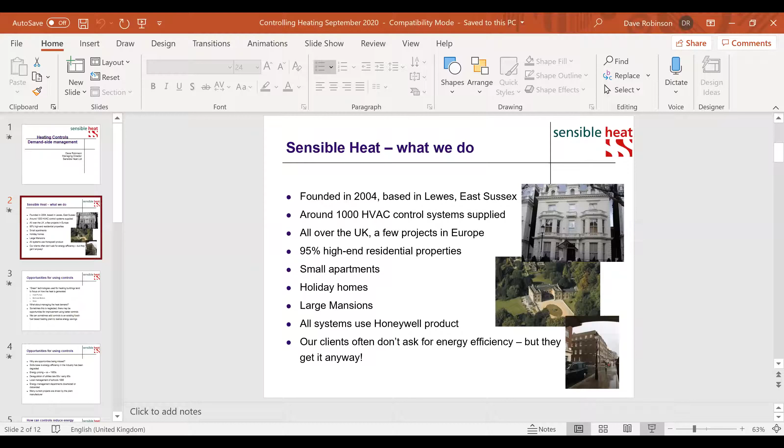Interested in energy efficiency, but if you like, a secret passion of ours is they get energy efficient systems from us whether they like it. I guess the other benefit is that we see.

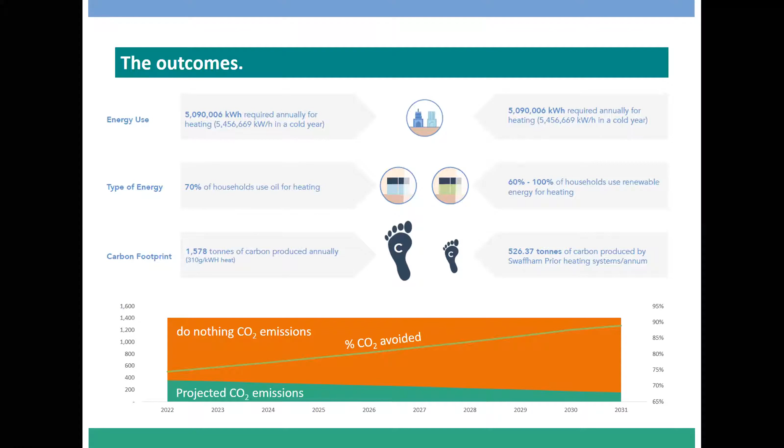So this really gives you a sense of where we're at in terms of reducing our carbon footprint and the amount of energy use that we're going to be potentially generating.

I just wanted to show you how we progressed through the funding. So the Community Land Trust were the ones who approached Rural Energy Fund and managed to get £20,000 to do their first initial feasibility study in the village. This was also a mechanism to engage with residents, to ask are you interested in us doing something or not. And there was strong support for doing something, taking off oil and being more environmentally conscious.

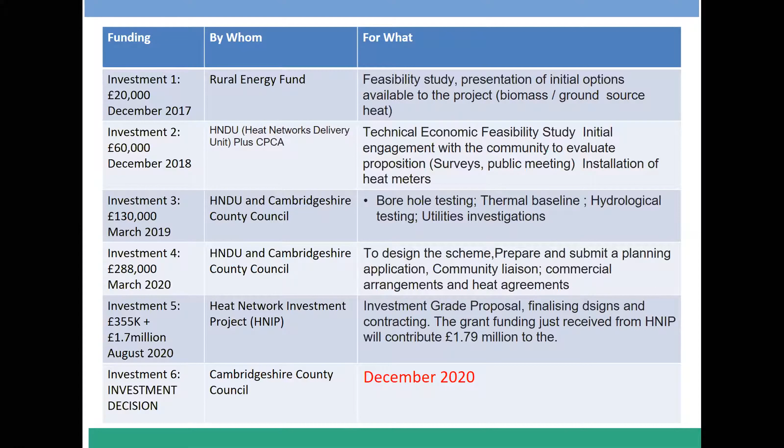So we're now currently in investment round 5, and we're in the commercialisation phase. We've submitted a planning application, and that's going to be determined next month, hopefully. And we're working towards an investment decision in December.

The farm currently has a tenant farmer, and the tenant farmer has worked with us and agreed that we can take this land. There's a barn on this land, and we're going to use the barn to host the energy centre, and we're going to use the field to drill 130 boreholes 200 metres deep to extract heat. We're also going to have an air source heat pump in there, and we're also going to have thermal stores, and I'll show you some pictures of that in a minute.

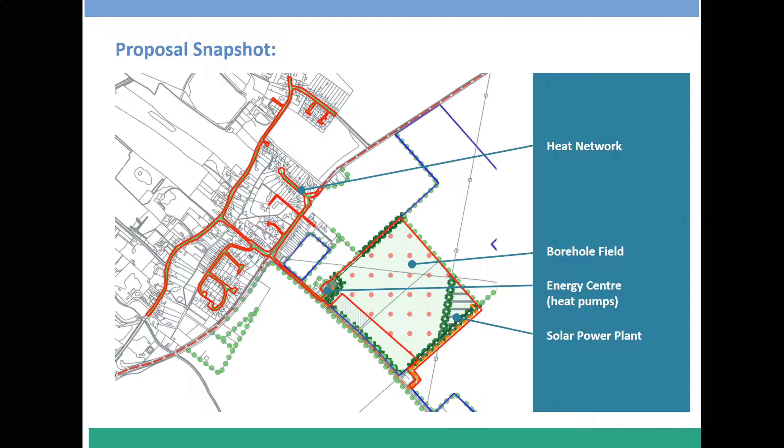The original plan was to also support the electricity, because you have to use significant levels of electricity for the heat pump, even though it's very efficient. We were going to be putting in some solar panels in the field as well to be able to generate renewable energy, and I'll talk to you about how we've changed that to an even better solution. So that's what we're trying to do.

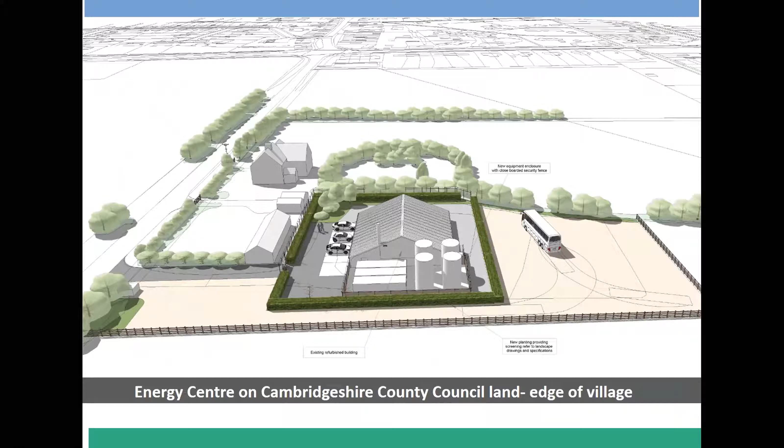This is just a quick infographic of what the original barn is going to be changed into as an energy centre. The idea is that we will also use this as an opportunity to bring school groups or visitor groups to see how you connect a range of technologies together and how they interact and function.

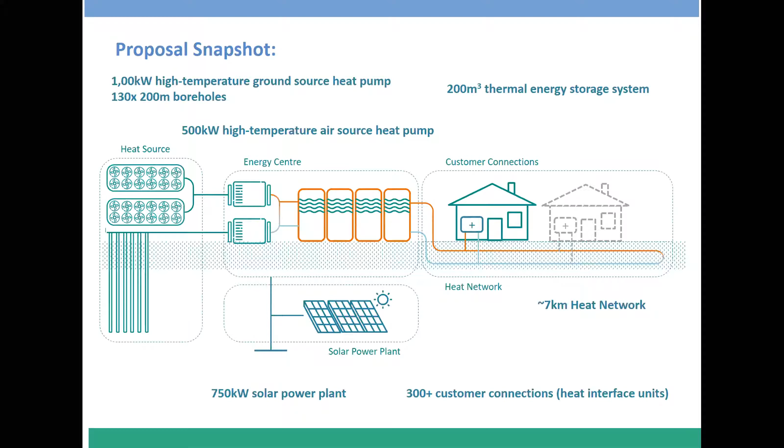Just to give you an example of the type of data challenge - when you have an oil-based community, you're not actually 100% clear on how much oil is used by a home, because what tends to happen is you get 1,200 litres delivered, but you might already have a residual level in your tank. So you're never quite clear how much you've got, and your bill just says 1,200 litres delivered on March 21st. So we had to try and work out how we were going to get much better, more granular data to support the calculations of just what size this energy centre is going to need to be.

So we installed heat meters in a number of houses, trying to look at different archetypes - your 4-bedroom listed building, your 2-bedroom more modern 1960s build, to be able to get an assessment of the profile of the demand as well as the actual demand. We've also had to access other sets of data to help us work through that. That was one big challenge that I think people don't realise you might face - getting good data.

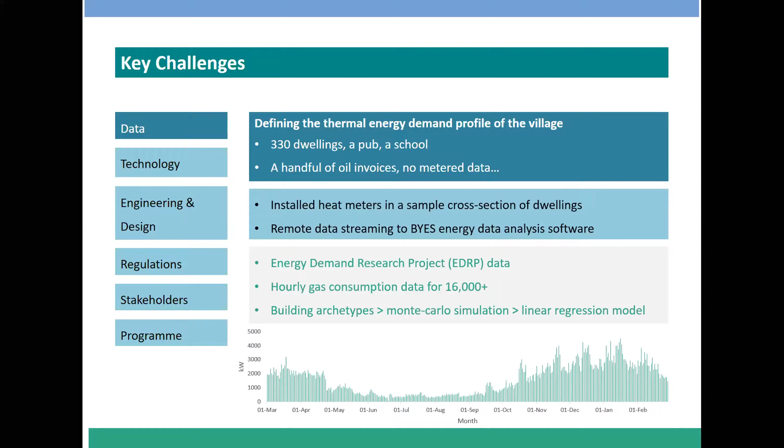The second challenge was around technology. In an oil-based village you tend to have oil boilers, oil tanks, and a high temperature heating system. Traditionally, like my own air source heat pump, you work at a much lower temperature compared to the wet heating system already in the house. So we needed to design a system that fitted with the existing wet systems in people's homes, because otherwise the cost of replacing all the pipework and radiators would be too much for the project to bear, and it would be a barrier for residents.

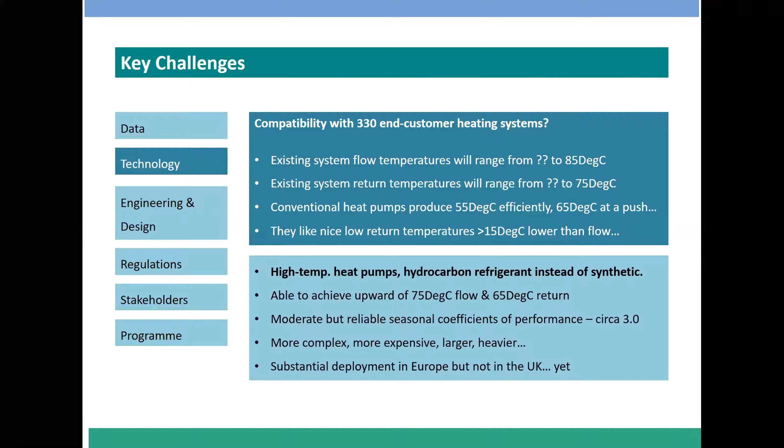So we've had to really think about what we can deliver and do a lot of market research. What we've come up with is a high temperature heat pump that can work at 75 degrees. This is really important for residents because it minimises the impact as you go into the home. But it's more complex, more expensive, larger and heavier, and deployment hasn't really taken off yet in the UK, though it's well known in Europe. So then the next challenge I wanted to highlight was around engineering and design.

We'd originally started thinking we were going to do an open loop ground source heat pump, and we changed to a closed loop. Partly that was because when we drilled our first test borehole, going down 200 meters, we hit significant clay layers called green sands clay, which meant our loop would get bunged up with claggy clay, causing a lot of downtime with maintenance. That was a really positive thing to find out early on, before we'd started anything, that we had to change to a closed loop system.

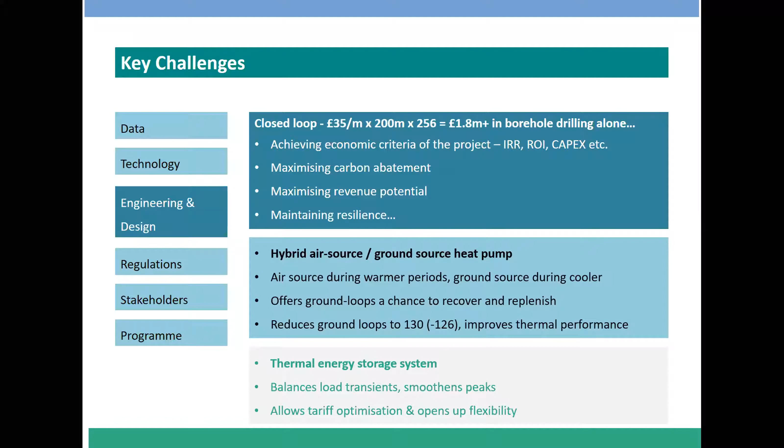We also went for a hybrid solution of ground source and air source, because that came out as a more cost-effective mechanism. We're going to feature the air source more heavily during the summer months, which allows the ground where the ground source heat pump is installed to warm up, so that when we extract heat over winter using the ground source heat pump, we don't end up freezing the ground over time. That was probably one of our biggest learning lessons, that you have to be really careful how you deploy arrays of vertical ground source heat pumps for community scale projects, so you don't freeze the ground.

So then the other thing around regulations, for example, is we've put in our planning application, which is just being determined. We had to go through an EIA screening process, an environmental impact assessment screening process. Fortunately for this project we weren't subject to an EIA, because that would have added time, cost, and additional work. But it's now being determined, and we're also having to look at listed building consents.

With a lot of villages there's pride in what the village looks like, so there was quite a lot of concern about how you would connect a heat network into some of the lovely old buildings. We're working together with Historic England, East Cambridgeshire District Council Conservation Officer, and the archaeology team at Cambridgeshire County Council on a local listed building consent order, which applies to the whole village across all the archetypes of listed buildings. This lets us agree in advance how the access looks into the homes, so you don't have to submit an application for every single listed home that connects to the local authority, which would take up a lot of time for everybody and is another barrier for people's engagement.

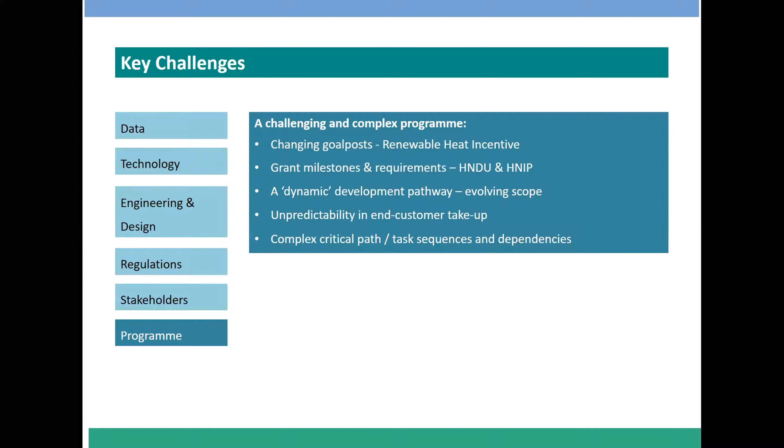Now, you've noticed I've just clicked over stakeholders, because I'm going to come back to that in a minute. One of the other really big problems for projects is how do you make all the revenues stack up for a project. For this project, we are relying on three key areas of mechanism of income.

One, that residents sign up. And just so you're aware, we've guaranteed them that this will be less than the price they currently pay for oil. The second thing is we've also guaranteed to them that they won't have to pay to access the project if they sign up before we construct. So what we're trying to do is take a barrier out, which is the ability to pay.

If you have the ability to pay, you might already have taken the opportunity to go and do an air source heat pump on your home. But actually it's a big barrier for many people. It does mean that we need at least 160 residents or homes to sign up to our project. And a second part of our income is we're looking to access the renewable heat incentive.

Some of you might know that this is closing at the end of March next year, and there are quite a lot of criteria that you have to fulfill to be able to access it. It's a key part of our funding, and we're working very hard to get there in time. There's a big risk that we don't get there, and that's one of the big problems that we're managing at the moment. The other source of income we're going to be looking at is around how can we sell the carbon emissions from this project so that we can make the project stack up financially.

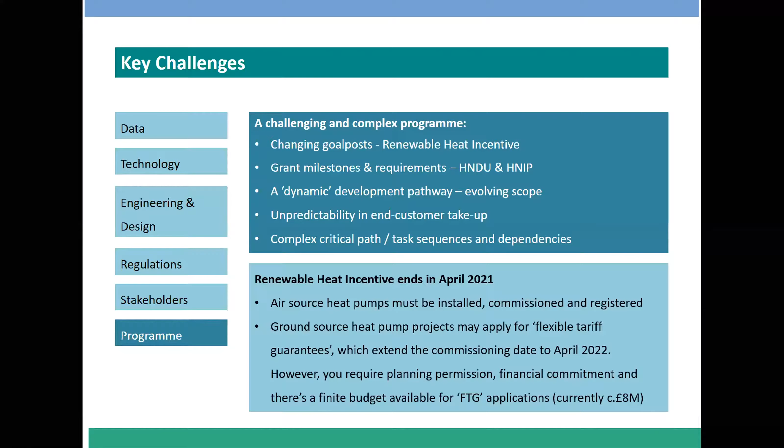So where we're at now is we've got technical feasibility established, we've done our designs, we've done techno-economic modelling, we've looked at different options and come up with the option that we think is the most applicable for this village. We've done our planning application, we've done all of our archaeological investigations. We're now in discussion with UK Power Networks around the load this would connect to the distribution network, and we've been doing a lot of soft market testing with all our supply chains. So we're currently working on our investment grade proposal so that we can make a final investment decision by December.

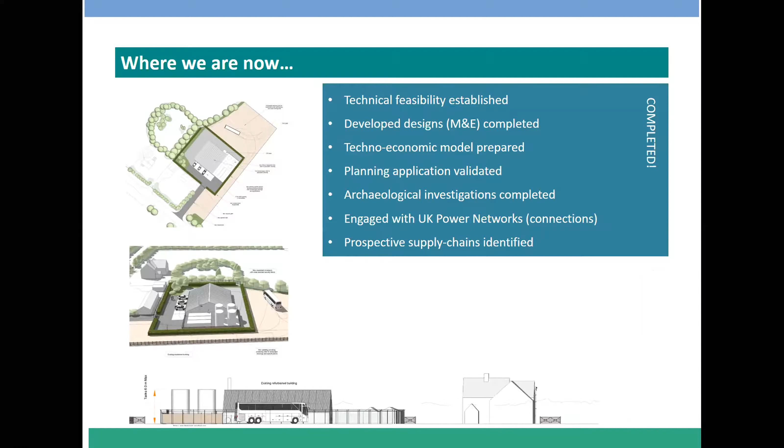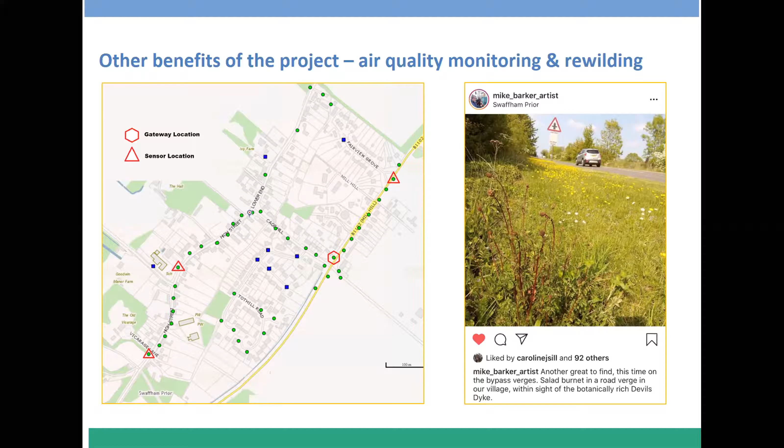So one of the other benefits of the project is that we have put up a number of air pollution monitors throughout the village, so we can try and see just the air pollution benefit that might come from stopping fossil fuel burning. And the other benefit we're working on is how do we add some significant more rewilding into the farm that we're taking over, because you can have a ground source heat pump in there, but you can't plough over the top of it because you can't plough deeply. So what is it we can do across the village to support that?

I just wanted to finish by saying there's a lot of people in the village who are vocal and want to be part of it. There's also a lot of people in the village who are more sceptical. And then there are some people in the village who are absolutely anti the project. So it's a very difficult balancing act to get a whole community to come forward and support something. I'm really happy to have a detailed discussion about that later. That's it, I think.

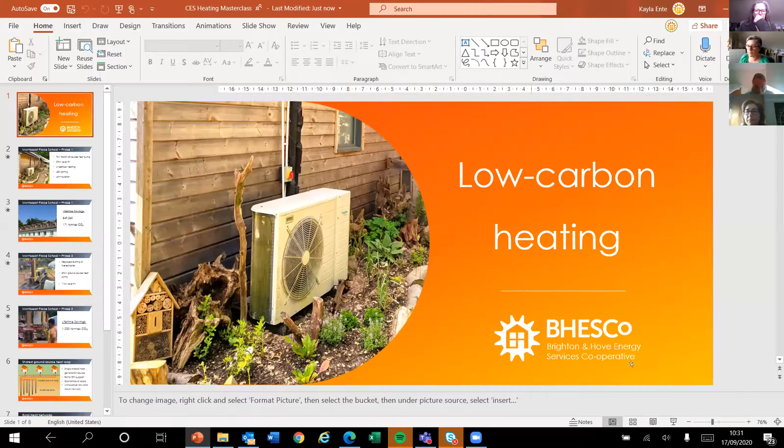Right, my name is Kayla Ente. I'm the CEO of Brighton and Hove Energy Services Cooperative. We're a membership cooperative developing community-owned energy projects, and our focus is on renewable heating.

It's very challenging to go after Sheryl's presentation because their project is so impressive and ambitious. However, this is just one customer where we've worked over a period of 4 years to completely decarbonize their site. So I'm going to take you through the journey.

They're a school in Framfield, a Montessori school, and the governors of this school are very future thinking, and the students are really involved with climate. They've done a terrific job of demonstrating how you can become zero carbon emissions on a school. They were on oil heating, and they bought this property about 4 years ago, and we've accompanied them on the entire journey.

So the first phase was about installing an air source heat pump for the small nursery, which you can see here. We put 27 kilowatts of solar PV on, about 10 kilowatts on the nursery building with underfloor heating, so that the small children could play on a heated floor, with LED lighting and loft insulation in the main building.

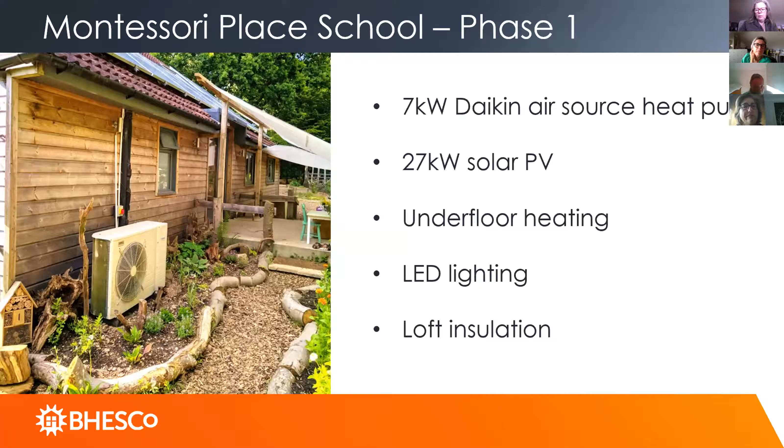This nursery building they built back from scratch, so we were able to put in insulation. This building is the main building, and that's where we did the loft insulation in those eaves, and we put the solar on.

So the interesting thing about doing renewable energy and energy efficiency, and the whole reason why we're involved in it in the first place, is because we really do believe that you can save from generating your own electricity and saving on your energy.

And for this customer, the lifetime savings that they'll get, even paying us back for our upfront finance, was about £50,000, and they're going to be saving 171 tons of CO2 emissions over the life of this work, which is about 20 years. Of course, we all know that the grid is decarbonizing over time, so this figure could be overstated depending on how low we can get the grid to be.

The second phase was to replace the existing oil boiler. So we installed an 87 kilowatt ground source heat pump. We had problems in the drilling as well - we had to put in steel casings in the boreholes in order to keep the ground from leaching into the boreholes, which added extra expense to the project.

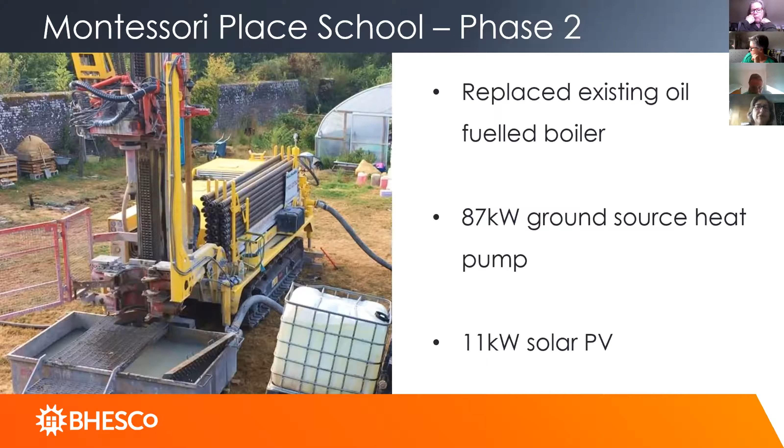And so then we're also putting in 11 kilowatts of solar PV to help with the heat pump, additional to the 27 kilowatts they already have on the site. You can see that they're growing their own food, and the kids learn about agriculture as well, and it's a really beautiful school to be involved with.

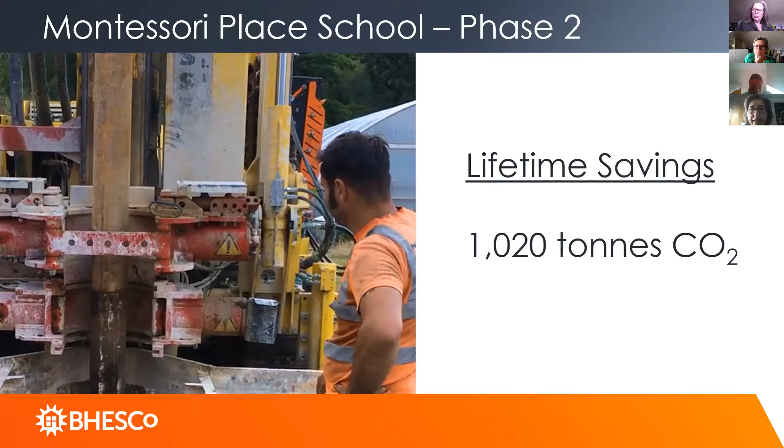We estimate that the lifetime savings, again, from the ground source heat pump will be over 1,000 tons of CO2. Again, that depends on how much we decarbonize the grid. But the most important thing for us is that we're going to be taking out that oil tank completely, so they're not going to be using any fossil fuels on this site anymore.

I just wanted to talk a little bit about villages as well, because BHESCo's strategy is to start pursuing microgrids, looking at small clusters of properties and putting in shared ground loops.

As we know, the RHI is going to change, so I'm not sure how sustainable this is going to be in the future. But like Sheryl said, if we can get a price for our carbon emissions savings, if there's some way that maybe community energy groups can work together to put together our carbon emission savings and work at scale, that might be an idea for us to be able to generate some value from our projects together to be able to sell that carbon emission savings.

But we definitely feel that the decarbonization of heat is one of the most important issues that faces us as a nation, not only to deliver low carbon heat, but also to deliver affordable heat.

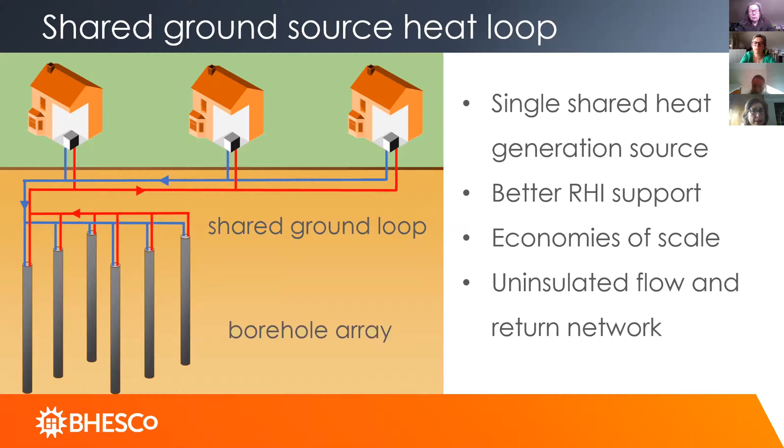And so I just wanted to talk about that for a minute and to show you the shared ground loops that we're looking at in a village with the clusters of properties. This is 22 homes that we would do on a shared ground loop. We're working on this project right now, and we're hoping to be able to deliver it before the end of the RHI, as Sheryl has said, in the end of March.

But we believe that community ownership of heat networks in an ESCO model can be really attractive, and we're going to see if we can get this to work in this village. It's part of a larger plan to install 4 megawatts of solar generation, and look at supporting the grid, because grid reinforcement is a really big issue, cost-related issue with heat pumps. Cheryl didn't talk about that, but that's definitely something that needs to be addressed, and I hope we can talk about that afterwards, what we can do in community energy to support the grid, because these low voltage networks

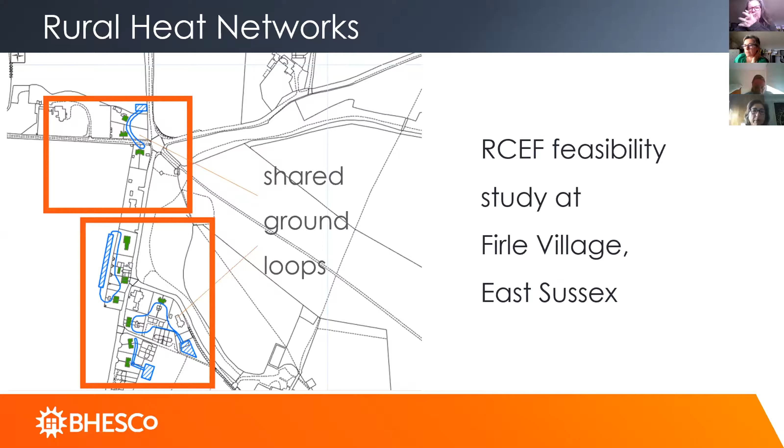So maybe later we can talk about this project, and if you have any questions, I'm certainly happy to answer them.

Hi, Kayla. Well, that's great. Thank you very much. And just to reiterate that small is beautiful, and quicker and easier to put into effect than the fantastic project at Swaffham Prior, which Cheryl was saying has taken so much time to get to this point. So we've got a few questions for you as well.

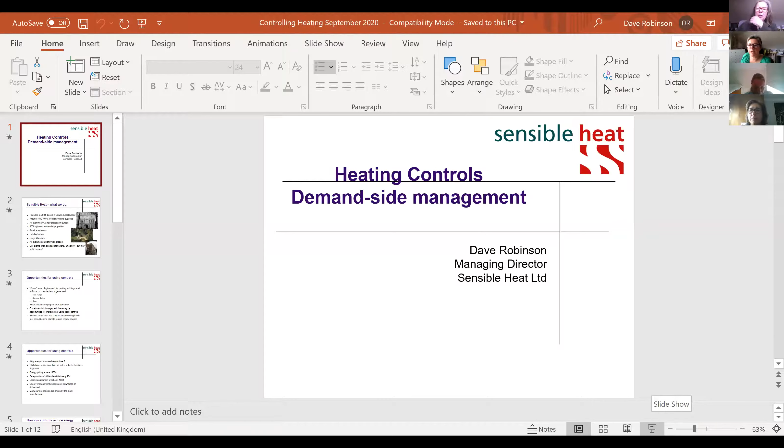See if we're seeing that or not. Dave, we can see it, but I think your sound has gone again. Right, okay, that might be problematic. Can you hear me now? Yeah, I think it's still slightly on. Do you think we should show it screen share from your machine, Liz? Yeah, I'll end this then. Right, sorry about that. So can you hear me all right now when I'm not screen sharing? Yeah, so maybe I'll turn the video off. How's that? Okay, can you hear me now? Yeah, and Liz will now share her screen so we can see the presentation.

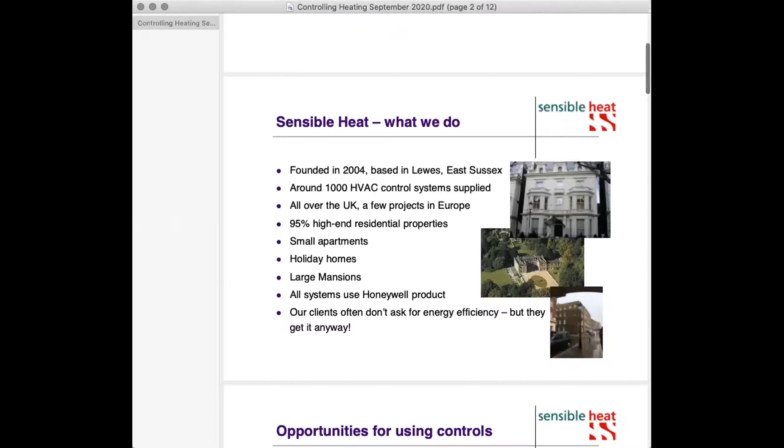Okay, I hope everybody can see that. It's going to be not so good because it's a PDF version, but never mind. Hopefully you can all hear me. Can you give me a thumbs up, Nikki, if you can hear me? Great, lovely. Okay, so here we go again then.

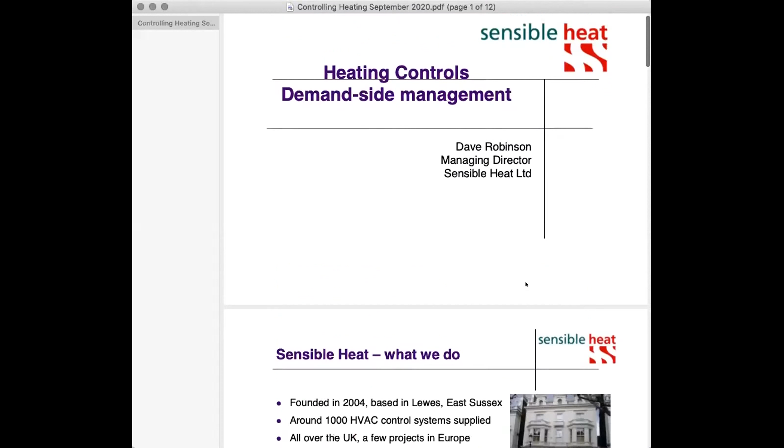So my name's Dave Robinson. I'm MD of Sensible Heat Limited. We're based here in Lewes, if we can have the first slide, Liz, up.

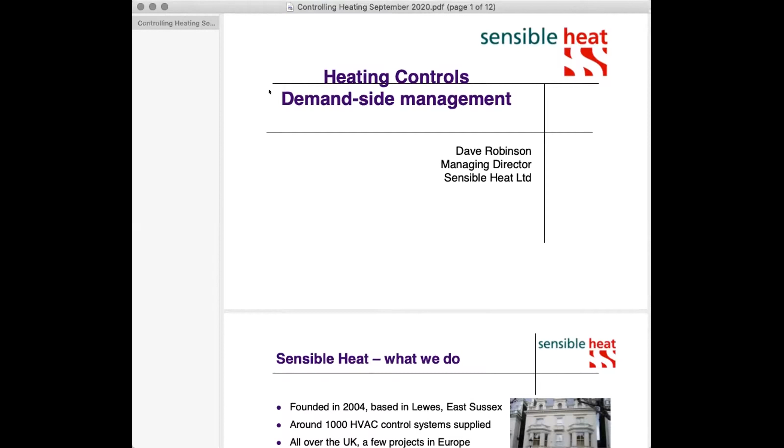And we've been going about 15 years. We're a bit of an odd company, perhaps odd at first sight for this kind of forum, because we are very specialist. We do clever heating and cooling controls for expensive houses, and we do it all over the UK, a little bit in Europe. I guess we've done about 1,000 projects in the last 15 years, which is quite a lot for a small firm, very specialist, as I say. So these are a lot of celebrities' homes. That's David Beckham's house there, in London, and various oligarchs and so on we've worked for in the past. So that seems odd because none of these people are at all interested in energy efficiency, or most of them aren't anyway.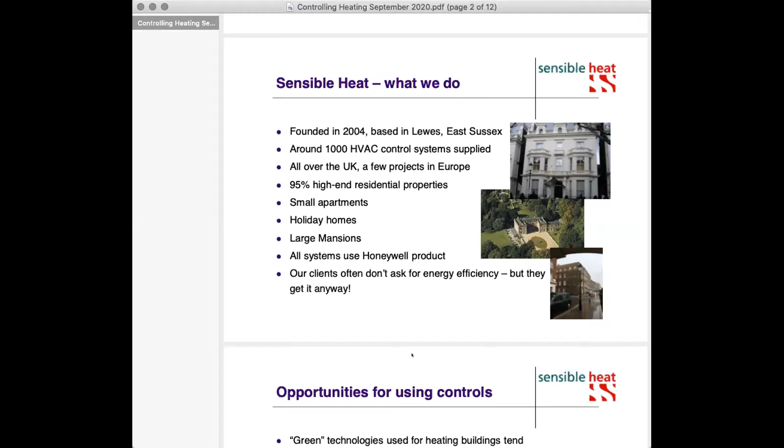However, the buildings are all quite complicated. They're using very much the latest technologies. We've done lots of work with heat pumps, combined heat and power engines, all sorts of things go into these houses, because they have to work to a high performance level, and often there are planning reasons why they have to be green, whether the owner wants them to be or not. So we've seen a pretty large selection.

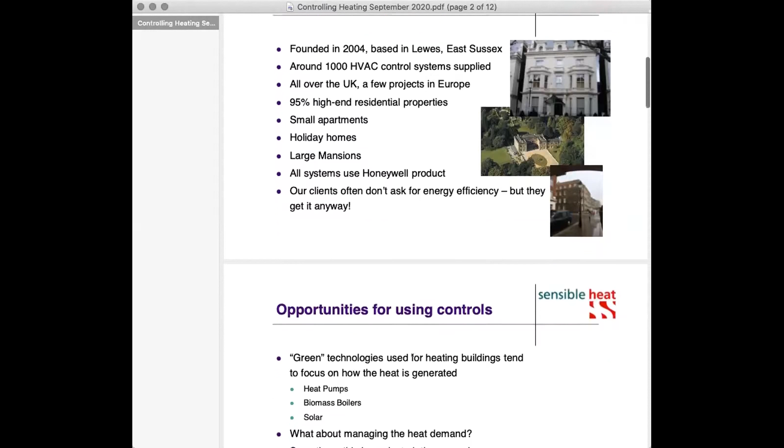So I'm here really not to talk about posh houses, but to talk about the controls themselves, because prior to that business, I was in the building management system business. I worked 10 years for Trend, that you may have heard of, and 10 years for a manufacturer that we started up, spinning out of Trend. So I had 20 years in commercial BMS, building management systems, which are really for commercial buildings, schools, hospitals, supermarkets, all sorts of things. What I've found over the years is that now that we're into this sort of green phase, if you like, everybody tends to focus on the prime mover in the heating scheme, i.e.

What's generating the heat—we hear a lot about heat pumps of various sorts, different boilers, solar and whatever, but we don't hear a great deal about what's happening in the building itself, the consumers, if you like, of the energy.

And whether we could do something about managing the demand for heat rather than just generating it in an energy efficient way. Couldn't we do something to manage the heat better? Well, the answer is yes, and that's what controls are for. We tend to focus on new builds or major refurbishments where we can change the heating system for something greener, but we've still got a huge chunk of buildings in this country—something like 23 million residential properties, and goodness knows how many commercial buildings—that already have systems in them that are not time expired. We can't change them all overnight. So is there a quick win to fix a lot of these buildings and make them more efficient without changing all the plant? I think there are opportunities there.

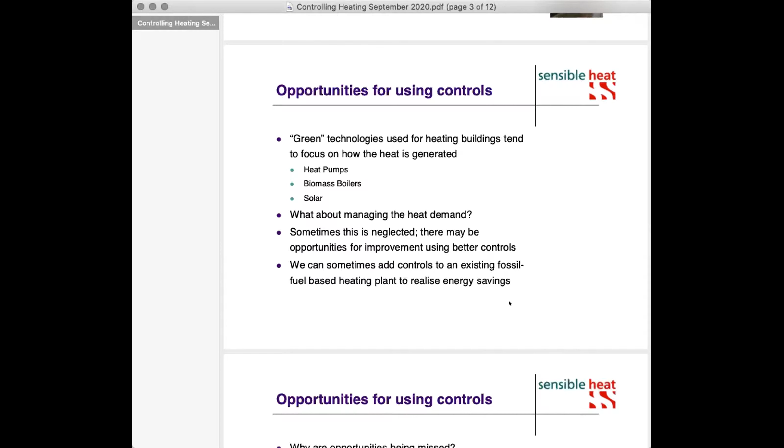Just a little bit of history here, because I've been doing this for quite a while. Back in the 80s, we were just coming out of an energy crisis. Energy was very expensive, and lots of organizations invested heavily in teams of people to understand that and manage energy better.

Local authorities all had quite big energy management departments. Lots of private organisations too—for instance, we worked a lot with Sainsbury's back in the 80s. They had a whole department just looking at energy in their stores, and we in the controls company had a whole team working with them to try and reduce energy usage in supermarkets, because they had a big store building program in those days.

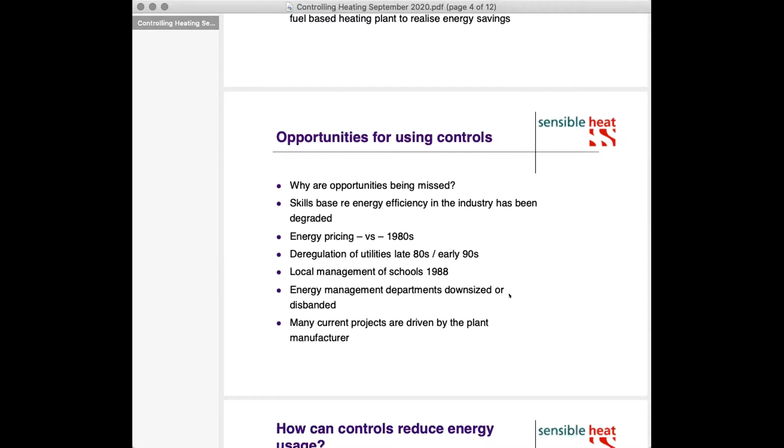Lots of things happened after that. Energy got cheaper, utilities got deregulated, which meant that energy managers, the ones left, were really spending a lot of their time doing the best tariff deals rather than putting technology into buildings to save energy. I'm sorry if there are energy managers here who think I'm maligning them—not at all, they were doing their job, but it changed things. So that's kind of what happened.

We lost a lot of skills in the industry, a lot of people, a lot of critical mass of people who knew about using controls to save energy. That's been displaced largely by manufacturers selling equipment, like heat pump manufacturers. They're selling their heat pump, which has its own controls on board, but that may or may not be the ultimate solution for the overall project—they're only looking at their little bit of it. So it's very much plant-centered these days, and I'd like to challenge that and say I think we can do better than that.

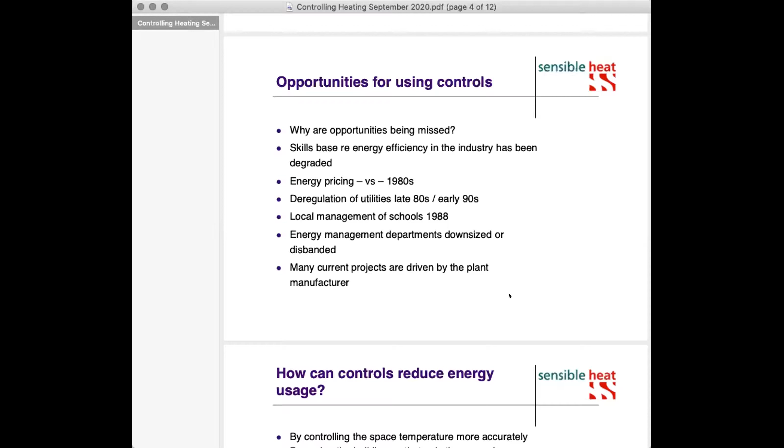So how can we use controls to save some energy? The first thing is to control the space more.

I don't know what happened there—I think somebody is not on mute. Could everyone just check that they've muted? Apart from Dave, obviously. Thank you. Okay, thanks, yeah.

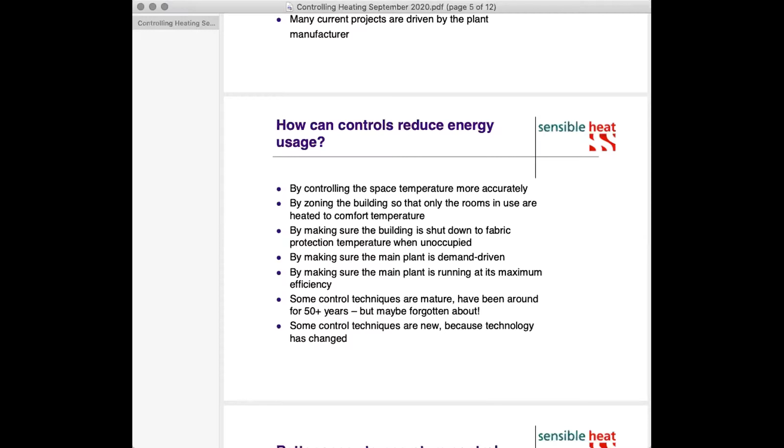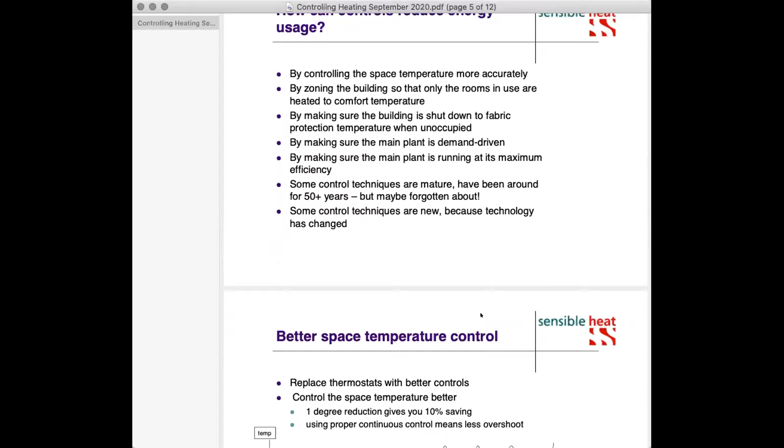We need to control the space temperature more accurately—I'll talk a bit more about that in a minute. We can zone the building up, because often the whole building isn't used all of the time. That's not true of maybe a school, but it's certainly true of a house, and true of buildings between those two extremes. When the building's not in use, we need to make sure it's controlling, not turned off, because you'll get fabric damage if the building gets too cold and damp. But we can shut down the temperature in the building and save energy that way. We also need to make sure the plant only runs when it needs to—when the space needs heat—and that the plant is running at its maximum possible efficiency. I'll touch on that again later.

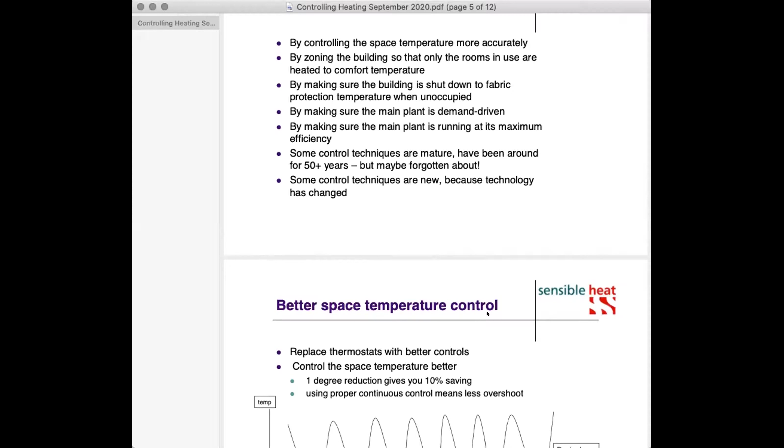So some of this stuff is well trodden, but may be forgotten about. Some of the techniques, some of the new technology we've had in the last 20 years, means we can do new stuff that we couldn't do back in the 80s, and I'll touch on that as well.

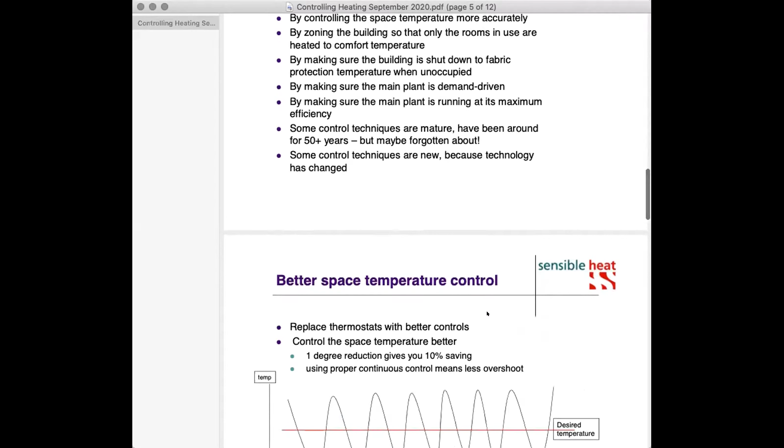So this business about temperature control. If we have a crude thermostat, which is an on-off device—I'm too cold, turn on; I'm too hot, turn off—you will get this kind of temperature cycling around the desired temperature. The problem is that you'll see the troughs more than the peaks as an occupant, and you'll tend to set the whole system to a higher temperature so you don't get cold. That means all the peaks are areas where we're wasting energy because we're hotter than we need to be. There's an old rule of thumb, God knows where it came from, but it's been around for donkey's years.

Very, very roughly, a degree over temperature wastes maybe 10% of your energy bill. If you can reduce your set points by a degree, you're going to save roughly 10%. Now, of course, that doesn't stack up all the way down to zero—it's not a linear thing—but it's not a bad rule of thumb for roughly how much energy you can save. It's not very much in terms of temperature reduction, but it saves a whole lot of energy.

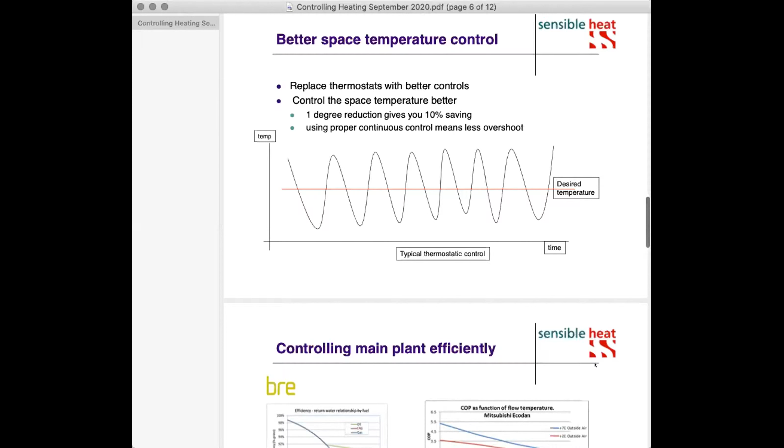So better temperature control: we need better devices rather than crude thermostats controlling things, and we need to be much finer in our granularity of control. So we need more thermostats, basically.

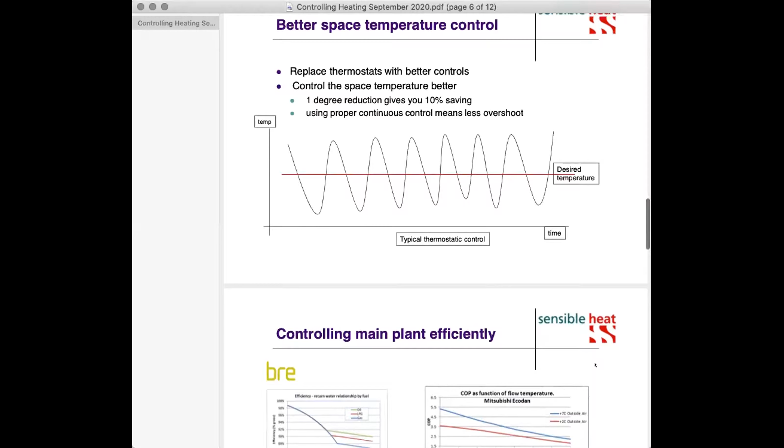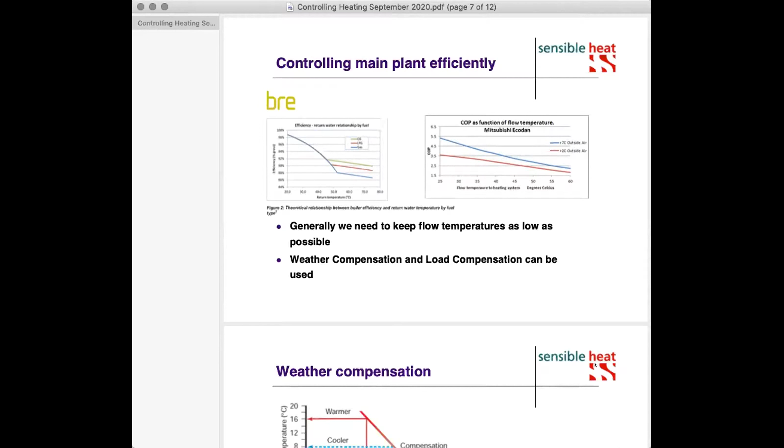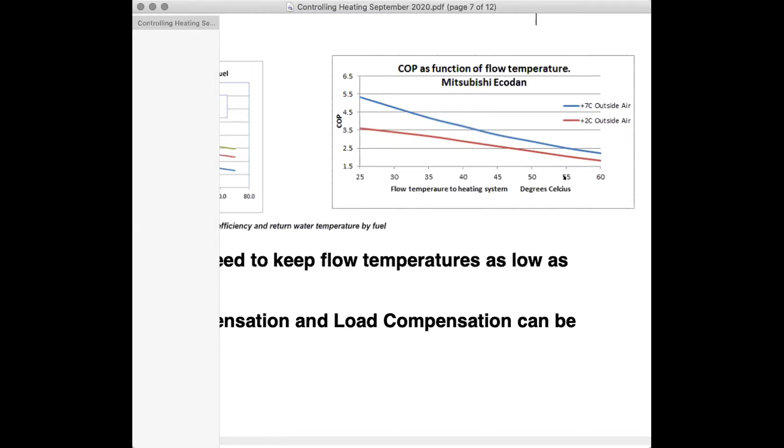Just moving on to the issue of making plant run efficiently. Now, we've heard a little bit about heat pumps—coefficient of performance, COP. That's the right-hand curve there, and that's a curve for, in this case, a Mitsubishi Ecodan heat pump, which is a pretty common air-source heat pump that often does hot water as well, which, as we've heard, is the Achilles heel of the heat pump, because the coefficient of performance drops off quite a lot as you increase the flow temperature coming out of the heat pump. That varies again on an air source heat pump, and it varies with outside air temperature as well.

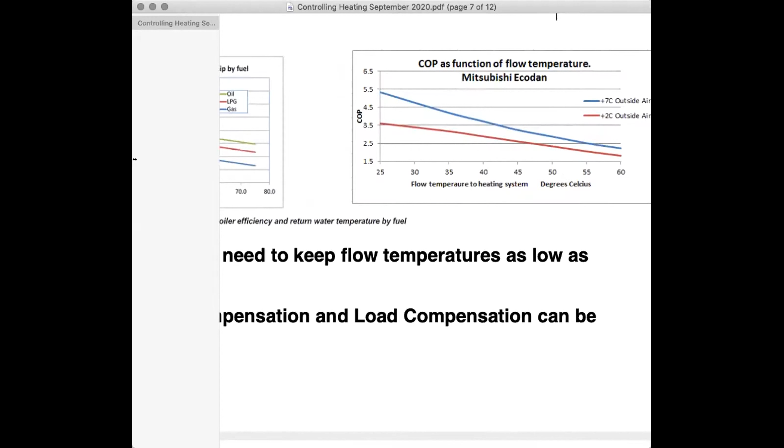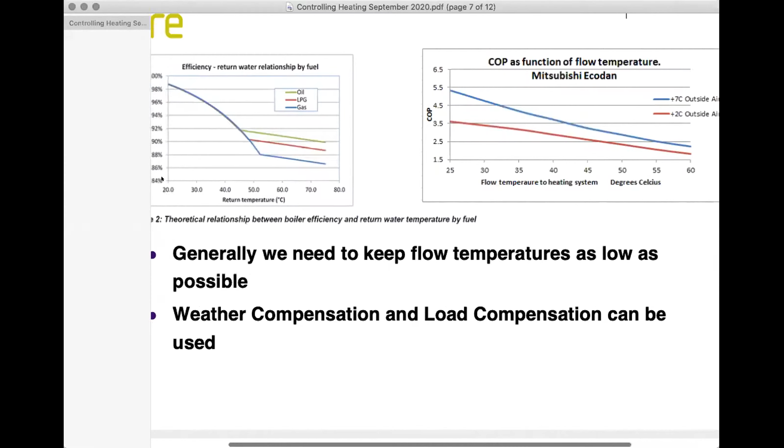So the coefficient of performance, just to remember what that means, is a sort of efficiency—it's 1 over efficiency, in fact. When you get down to a COP of 1, you might as well be on an immersion heater or electric resistance heating, because it means every kilowatt of electrical energy going in, you get 1 kilowatt out. It's only when you're up at the 2s and 3s that they start getting useful, because you're getting a multiplier on the electrical power.

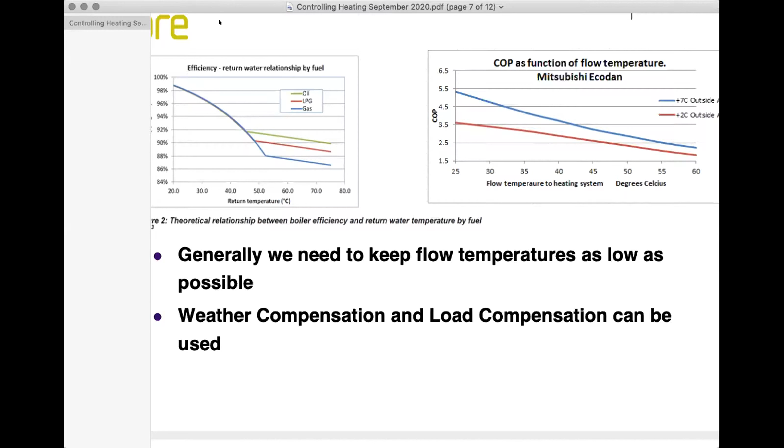That's true, but if you look at the boiler issue on the left there, boilers also need to be running cool, especially if they're going to condense. That's what the knee in the curve is all about—you see where the slope changes radically depending on the fuel. The bottom one is gas, so that has a condensing temperature; the flue gases have a temperature of 54 degrees, I think it is, for natural gas. What it's saying is, if we can get boilers to condense, then the flue gases condense, and we're recovering the latent heat that's in the flue gases—all the stuff that would normally go up the chimney. We're recovering the latent heat of condensation, and that helps the efficiency enormously.

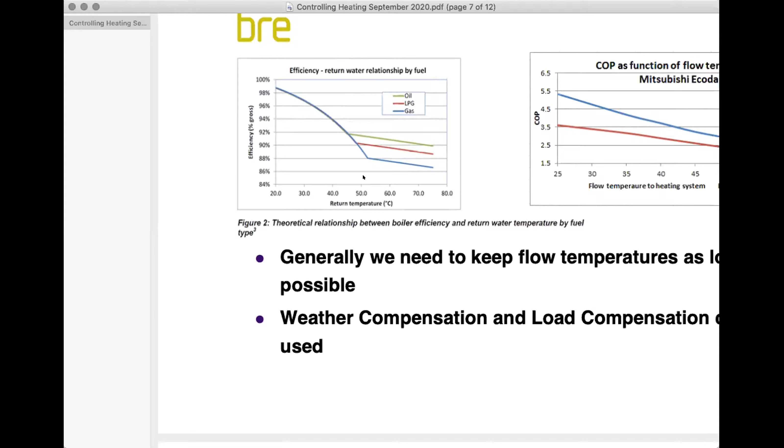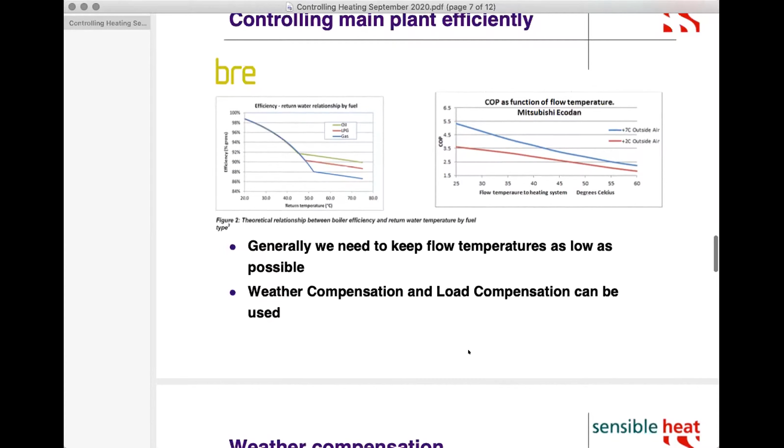So somehow we've got to get the water temperatures down, and that's tricky, especially with regard to domestic hot water. As we heard earlier, it's a problem because your domestic hot water at the taps needs to be at 55, 60 degrees or so, at which point you're getting poor efficiencies out of any of these systems. So we need to mitigate that.

One way we can do that is with weather compensation on the heating. This is a well-worn technique, and basically you can reduce the flow temperature going out from your boiler plant in mild weather—that's what it's all about. Because if you think about it, your boiler is sized for when it's really cold outside, running at full chat to heat the building. When it's mild outside, say 10 degrees, you only want maybe half the flow temperature, because you only want half the amount of heat, let's say. So you have a slope, and you can reduce the flow temperature going out, and hence the return temperature coming back to the boiler.

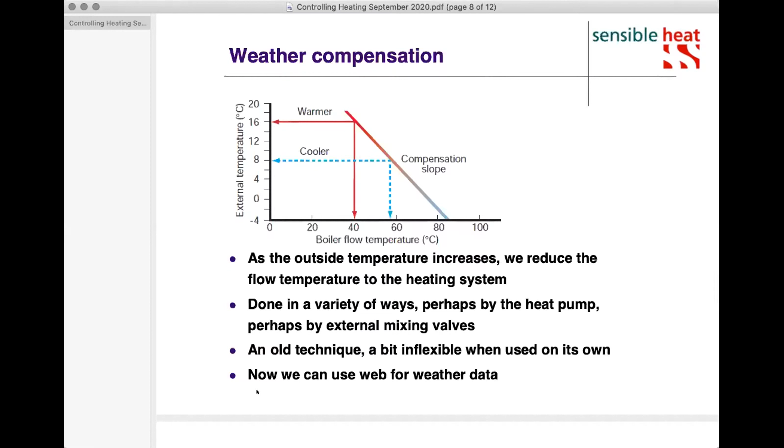That's usually traditionally done with an outside sensor. We can now use web data for perhaps more accurate temperature measurement, because that gives you a trend. Some systems now use prediction to tell what's going to happen next with regard to outside temperature. But certainly we need some sort of control.

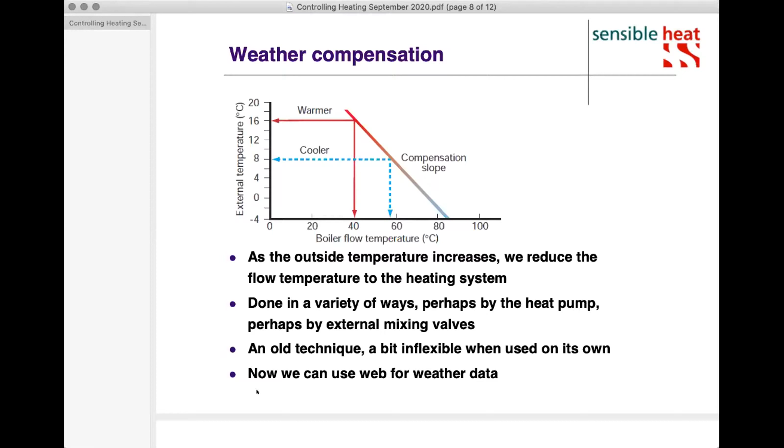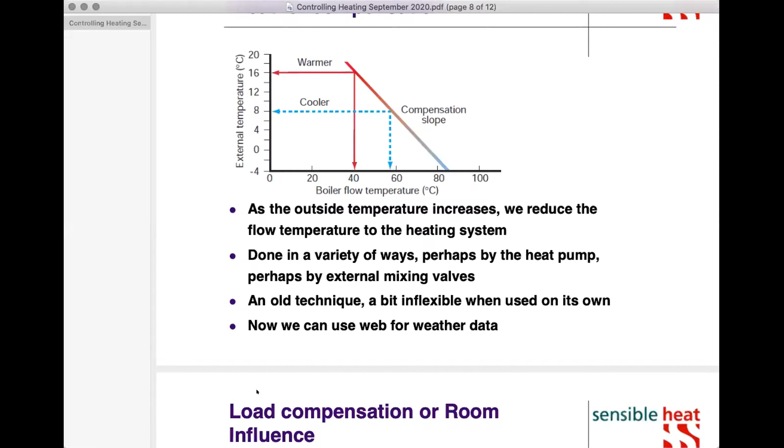Some heat pumps do this, and some boilers do this, but they tend to be boiler centric, and sometimes that's compromised by the system designed downstream of the boiler, because you've got underfloor heating, radiators, other things to heat as well, and that tends to be problematic. So you may need to strap external controls onto the system to get the maximum efficiency out of things.

The other technique - ignore the horrible graph. The takeaway is that weather compensation is a bit of a blunt instrument, because it ignores what's going on inside the house or building. It's only looking at the outside weather. You might have a sunny day and suddenly you don't need so much heating because the sun's warmed up the rooms, even though the outside temperature is low.

So you have a thing called room influence or load compensation, and that uses sensors in the house or building to affect the weather compensation curve. So if it's warm in the house, you'd maybe reduce the flow temperature. If it's still cold in the house, you'd boost it up.

External controls can do a better job than perhaps most systems that only use a single internal sensor, because where would you put that sensor? It's a big building and you've got maybe one sensor to sense the whole of it. We can do a bit better than that now with controls by putting multiple sensors in the building and taking an aggregate from them.

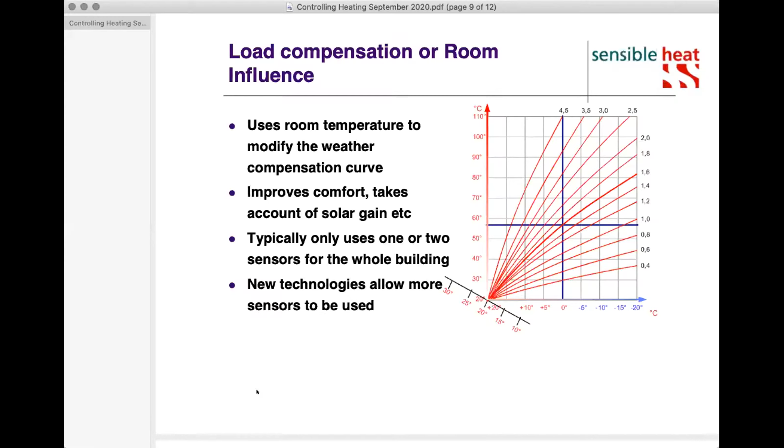Zoning the building: traditionally this has been very difficult and expensive, because say a school, for instance, typically is one zone. So the boiler turns on and it's feeding all of the radiators in the whole building at once, irrespective of how hot or cold they are, and irrespective of whether those rooms are being used or not - everything gets heated. The best you can do usually with conventional technology is put some thermostatic valves on the radiators.

But typically, even schools don't use all the rooms all of the time, and in other buildings, rooms are used very much so at different times. So if we could zone the building up and shut down rooms we're not using, we can get substantial energy savings.

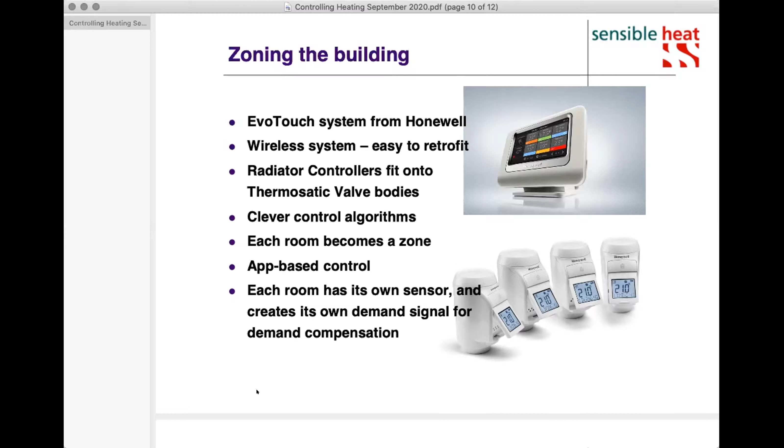So we can shut down areas that are not being used. The other thing about these systems is that they give you lots of sensors. Every room now has its own sensor, giving its own feedback to the central plant in the way I talked about. So we can do room influence on a much finer granularity, much more accurately.

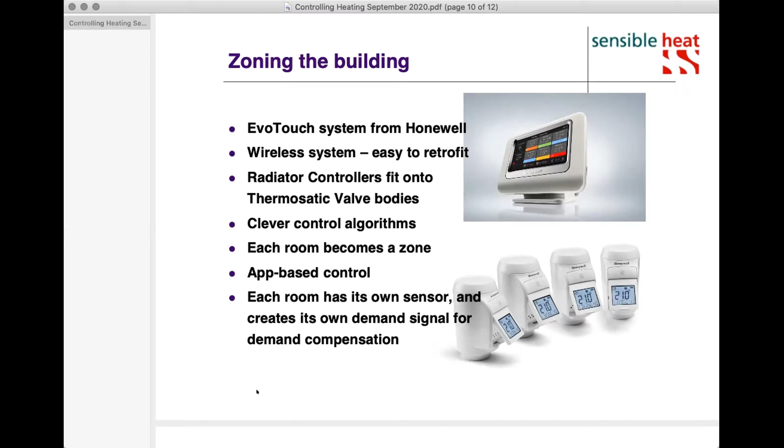That's the kind of user interface you get. The takeaway point here is that now we've got lovely clear touchscreens, easy to use. Everybody knows how to use a smartphone. That's made a huge difference to user interfaces generally, because everybody's familiar with them, and now they're not frightened by looking at something like this. It's pretty obvious how it works - you start pressing buttons and work it out for yourself generally, and you don't even need to look at the book.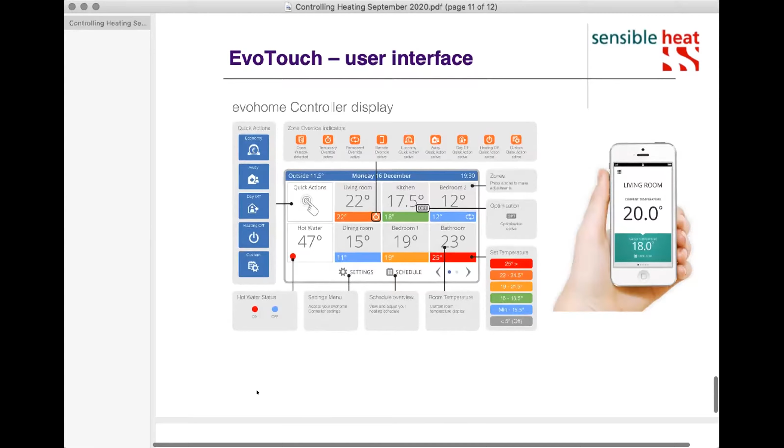So, easier. Just moving on to the summary now - conscious we're running out of time. My points here are: let's not neglect the fact that you can do more with overlaid control systems. We need to look at the whole building rather than just the plant room in order to deliver the best energy savings.

We can apply it to existing buildings without ripping out the main plant. Ultimately these plants all need to be changed, but right now we've got a huge building stock with existing plant in it - we should be able to do something about that quite quickly. The advent of wireless technology has helped in terms of installation costs and the user interface, with clear touchscreens and smartphones helping us get the best out of this. I think that's me done.